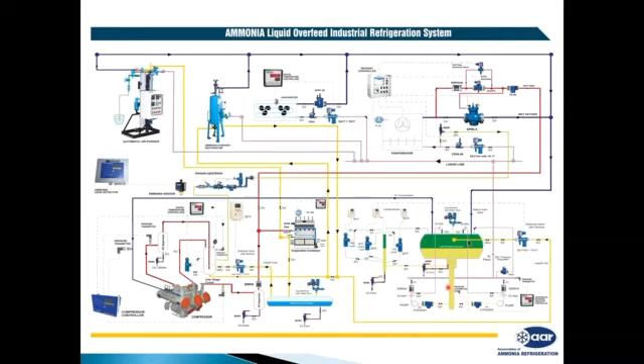One is ammonia overfeed system or ammonia pump circulation system, in which ammonia is circulated through the pump, and another is a natural circulation or gravity fed system, in which ammonia is circulated through the system by the pressure difference. This is because of the pressure difference that high pressure in the receiver travels to the low pressure side of the evaporator. There is a reason this is called the gravity system or the natural circulation system.

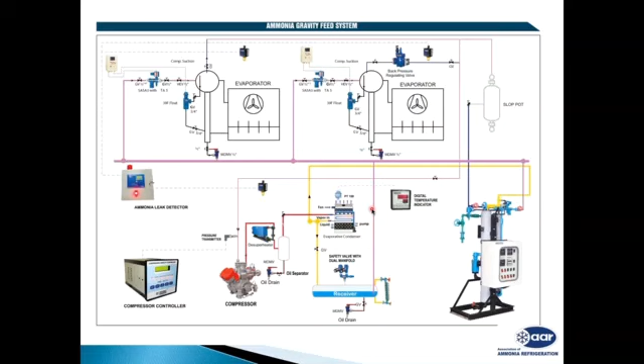The energy, as we consider now today everywhere, energy is the most critical part, and refrigeration is one of the largest consumers of energy in different applications of industry.

If you talk about the dairy segment, it consumes 30% of the energy. But if you go to ice cream, it consumes 70% of the energy or total plant energy. If it is a cold storage, then 90% of the energy of the cold storage is consumed in the refrigeration plant.

So if we are able to save anything in this energy part, we are able to achieve a great saving overall. And saving in electricity is directly affecting the net return of investment and the profit of the company.

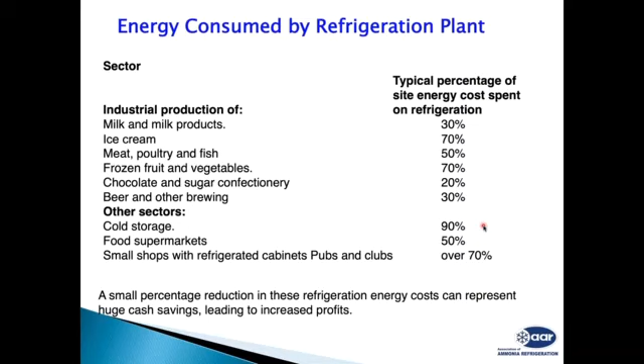So this ammonia, which we are talking about today, for our ammonia refrigeration system, we need pure ammonia. Pure ammonia means it should be 99.95% pure ammonia. Normally, when we buy ammonia from the market, we do not get a certificate of purity. It comes in a cylinder, and many times we don't know what is the purity of the ammonia received. I suggest whenever you are buying ammonia next time, please ask for a purity certificate from the supplier manufacturer.

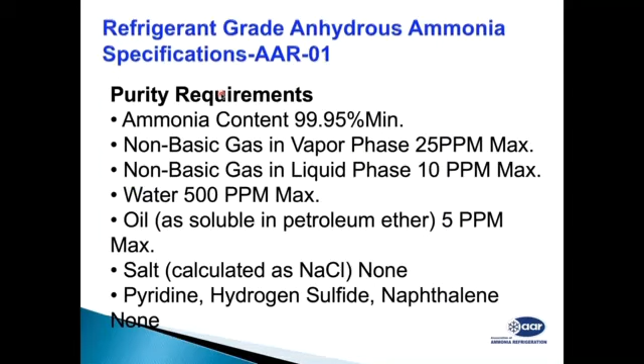So this water and the non-condensable gas, or the air which contributes the major part of it, affects our refrigeration system. Unfortunately it does not affect in a good way as it happens for human beings. Water and air we know is very good, essential for us, but they are not essential, or in fact they are not required in our refrigeration system.

Air is considered a non-condensable gas along with nitrogen, hydrogen, and hydrocarbons in an ammonia refrigeration system, particularly because in our operating range of say minus 45 to plus 40 or 42 degree condensing, these non-condensable gases do not condense or evaporate. They remain all throughout as gases, which does not give any refrigeration effect to us.

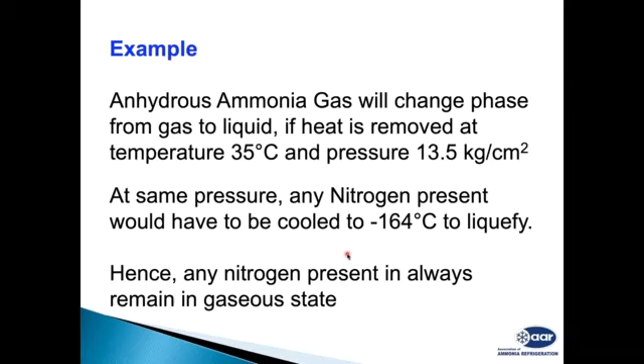For example, if we have ammonia at 35 degrees C, the pressure is around 13.5 kg per centimeter square. But at the same pressure, nitrogen would require minus 164 degrees centigrade to liquefy. So if nitrogen is present in our refrigeration system, it will always remain in a gaseous state, and any gas remaining in the gaseous state in the evaporator side will not generate any positive refrigeration effect.

What happens with this air or nitrogen or other gases, we'll see further - let's see how it comes into our system. Many times our refrigerant does not come with a purity certificate, so it contains non-condensable gases and air, and then our plant is installed.

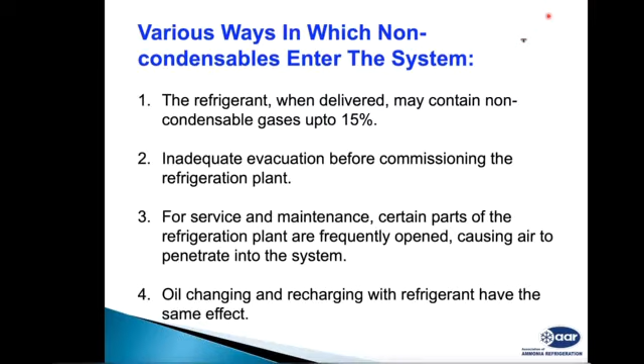When we are pressure testing, when proper evacuation is not done, proper vacuuming not done, after the pressure testing, when for servicing and maintenance we are opening any parts of the system, there is a possibility of air entering into the system. Then when we are charging ammonia oil or removing oil, we are opening a part of the system, and there is always a possibility of air entering into the system.

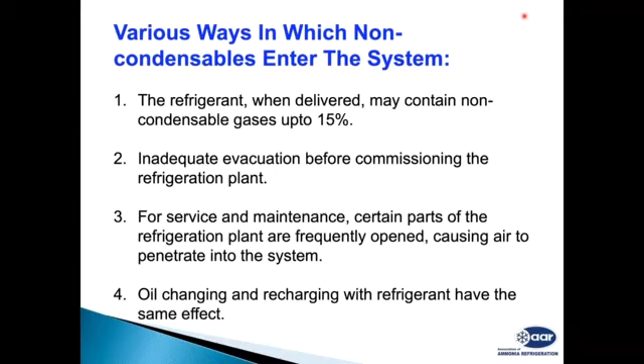Another thing that happens is leakages. When our plant is operating with suction pressure below atmospheric pressure - typically below minus 33 degrees centigrade - and if there is a small leak, whether in the piping, the welds, flanges, gaskets, or the glands, stems of the valves, compressor shaft seal, or sensors connected through sockets, if the plant is in vacuum, it means the pressure inside the plant is lower than atmospheric pressure. Then atmospheric air will enter into the plant.

Another part is that when there is air in the plant, the discharge temperature increases, which increases the ammonia temperature and also the oil temperature. Many times due to high temperature, oil may decompose, and this decomposition of oil, along with the catalytic action with the metallic parts in the system, may decompose the ammonia, because as we all know, ammonia is made of nitrogen and hydrogen. It will break into nitrogen and hydrogen. Both these gases are non-condensable in our system.

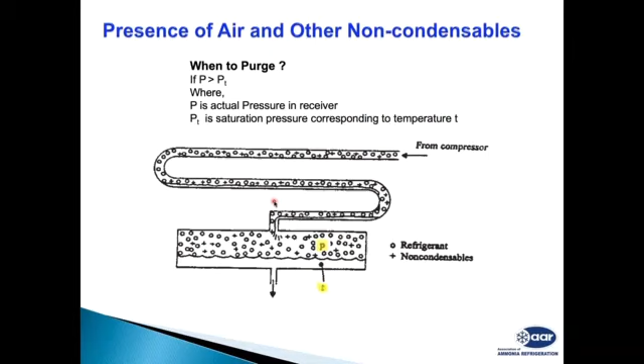If you are able to measure receiver pressure and the temperature of the receiver liquid, convert that temperature to saturated pressure, and find the difference - that is the air. This is our actual pressure measured on the gauge, and this is our equivalent saturated pressure of the liquid. The extra pressure showing is the non-condensable gases. For example, if our gauge pressure is showing 14.5 and our liquid temperature is say 38 degrees, which corresponds to around 13.7 to 13.8 kg per centimeter square pressure, then the difference of 0.7 kg between 14.5 and 13.8 is non-condensable gases.

These gases, the air or non-condensable gases in our system, increase our electricity demand, decrease our refrigeration capacity, and affect the overall performance of the system.

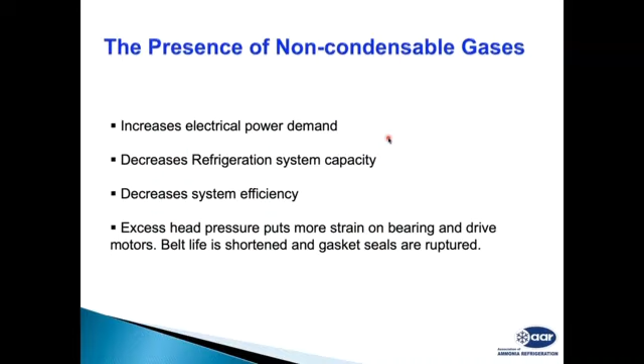Also, as the air pressure, the pressure in the system increases, excess pressure leads to bearing and drive motors heating. It also shortens the belt life. Gasket failures are regular with the compressor. Then increase in pressure also increases the temperature, which shortens the compressor valve life and promotes the breakdown of the lubricant oil in the compressor.

Increasing temperature results in increased scaling on the condensers, where we now need frequent cleaning, which increases the maintenance cost of the condenser. Increase in discharge temperature, as I explained earlier, leads to ammonia breakdown, and ammonia may break into nitrogen and hydrogen, which are again non-condensable gases.

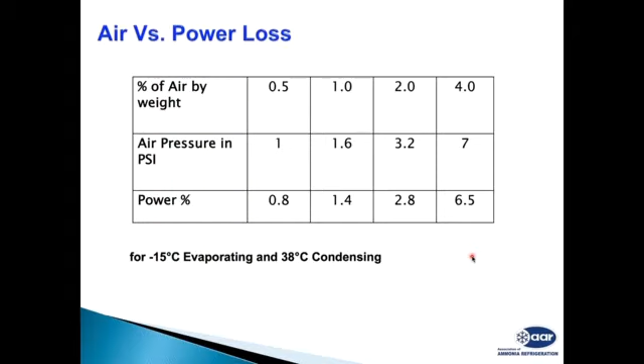So typically, if we have 0.5% air in our plant, the pressure can increase by 1 psi, and power consumption can go up by 0.8%. If we have 4% air by weight in our plant, this power consumption will go up by 6.5%. This is a very high penalty to pay for a running plant, because our refrigeration plant is continuously running. And if air remains in the system, this directly affects the power consumption of the refrigeration plant. If you add the losses from maintenance, oil failure, and component failures, it becomes very high.

So what should we do with this air? Naturally, if you don't want it, we have to remove it. This is called purging of the air. It means we have to take it out of the system.

So what types are available? We can do direct purging, also called manual purging, or we can do automatic purging. Automatic purging means there is equipment provided which will separate the air from ammonia and purge it into the atmosphere or water, whatever systems are available.

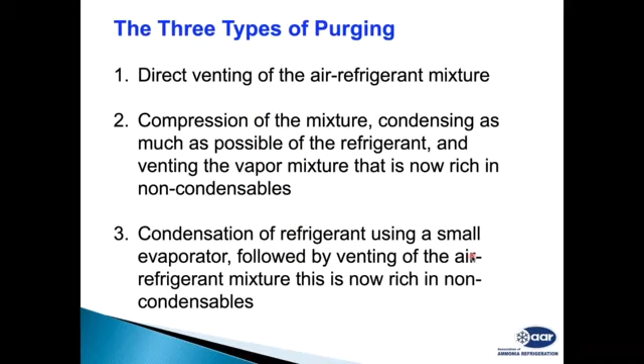Let's see what these three types of purging are, automatic and manual. And then there are two types of automatic purging. One is compressing the mixture and condensing it using an external refrigeration device. Another is condensing the refrigerant using a small evaporator, using the refrigeration system itself, in which separate compressors are not used.

Typically, what manual purging is, is we have a purge valve provided at the receiver or at the inlet of the condenser. It means we have to do it manually, shut down the plant, let the water run in the condenser for maybe an hour or so. So whatever ammonia gases are there get cooled down and become liquid, and what is left at the top is air.

You must understand the density of air is lower than ammonia, so air will go up and ammonia liquid will go down. So we have to give sufficient time to let it settle, with air ammonia liquid down and air up, then open the valve manually.

One has to take the most important precaution when opening these valves. We should wear a mask, gloves, and goggles, so that in case ammonia comes out of this valve, you are not affected. The possibility of ammonia leakage is always there. These precautions are very important.

Now it depends on the operator how much time he's going to spend on this, whether he's going to do it every day, or once in 15 days, or once a month. That totally depends on the plant management and the facility available to purge this air.

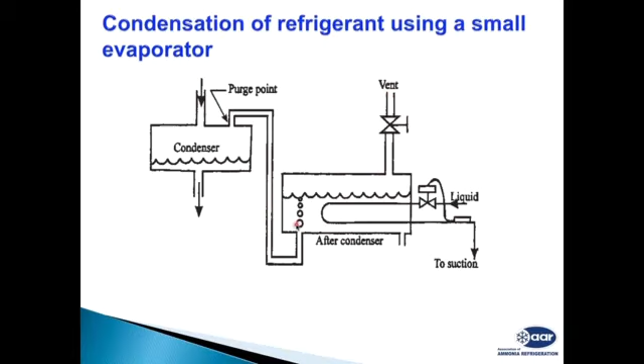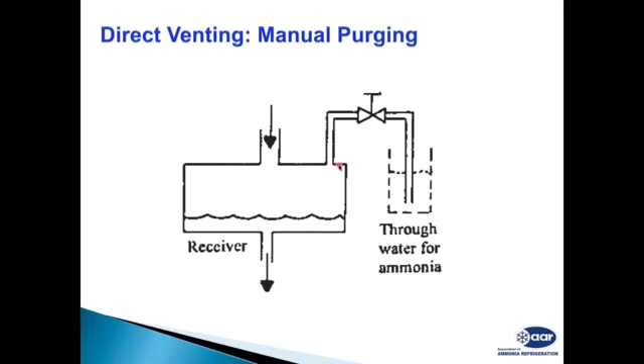Normally, it is provided with an automatic control system, so it will sense the difference between liquid ammonia and non-condensable gases, and it will vent out when the vessel is full with non-condensable gases. Remember, whether manual purging or automatic purging, the purge points are very critical, very important. From where we connect the system is very important.

So we'll talk about purge points afterwards. So as I talk about manual and automatic purging, what are the advantages of automatic purging?

Automatic purging removes air online continuously without affecting the system performance. No need to shut down the system. No need to have an operator to operate it. As it is an online system, it removes air immediately. There is no labor cost. There is no safety requirements. There is no manual intervention required in operating this purger.

Whereas there is a disadvantage, it has got initial cost. We have to maintain those purge units, maybe solenoid valves and other transducers connected to these things. But this is about capital cost. We will see later on what is the saving versus the investment.

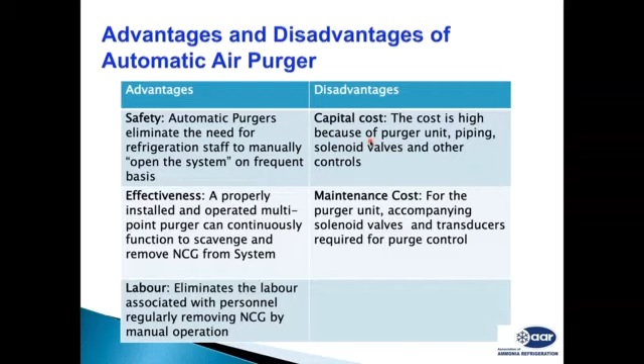As I said, proper location of the purge points is very important. For example, when doing manual purging, when you are shutting down the condenser, you have to purge it from the topmost point of the condenser or at the inlet point of the condenser, that is the topmost point of the system. But when you are doing automatic purging, this totally changes.

In automatic purging, we need to separate the air and the gas. In our refrigeration system, gas coming from the compressor to condenser may contain air. At the entry point of the condenser, this air will be at the same velocity as the ammonia. So if we try to take a purging point from the inlet of the condenser, our ammonia will come out. Let's say we have 5% air in the plant.

So when we are opening an inlet purge valve at the inlet of the condenser, 5% air and 95% ammonia means 95% of ammonia gas will go to the purger. So it will not work.

So we have to have purge points where there is minimum presence of ammonia gas, and we are able to separate out the ammonia liquid and the non-condensable gases or air.

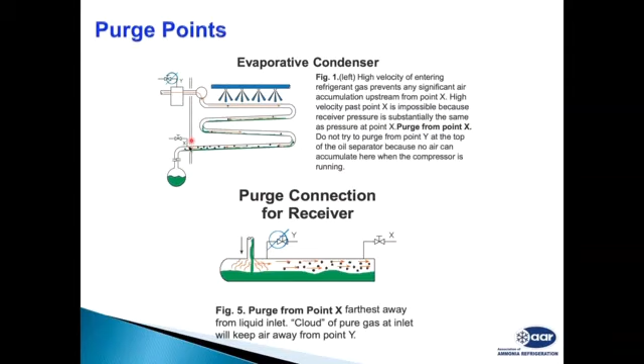But as we go down, at the end of the condenser, whatever ammonia gas is there becomes liquid, and what is accumulated is the air. So this foul gas, as we call it, we have to tap it at the outlet of the condenser.

Different applications. This is a manual purge point for the evaporative condenser. These are the purge points for the automatic purging system.

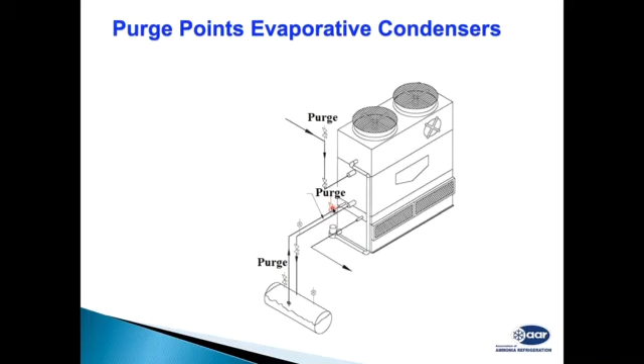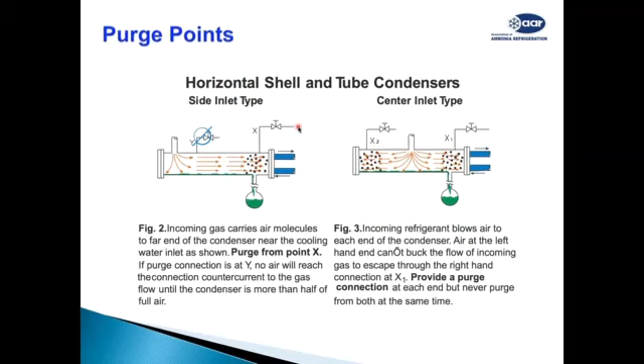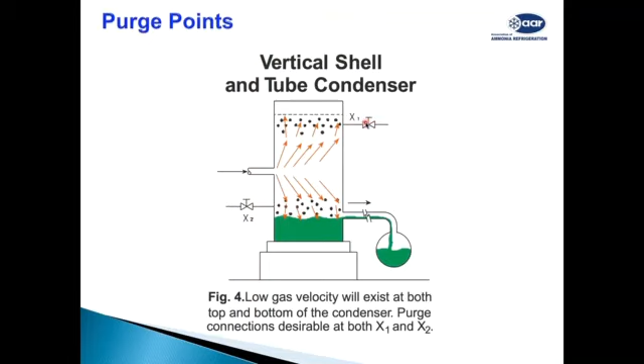Very uncommon now, but if we have vertical condensers, if this is our liquid entry, it should be on the top of this condenser side. These are the typical examples showing how two purge points are being taken.

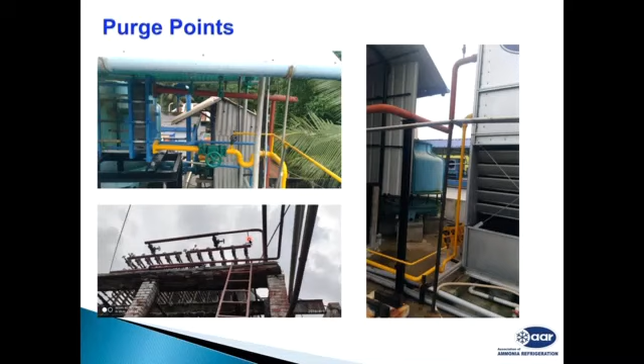In small cold storages, many times we use atmospheric condensers. We can use and install an air purger on atmospheric condensers also. You can see here this header is connected for a condenser, and the purge point is taken from this place on the header. So these are the different purge points we can connect. Always remember, success of an air purger depends on the proper purge point connections.

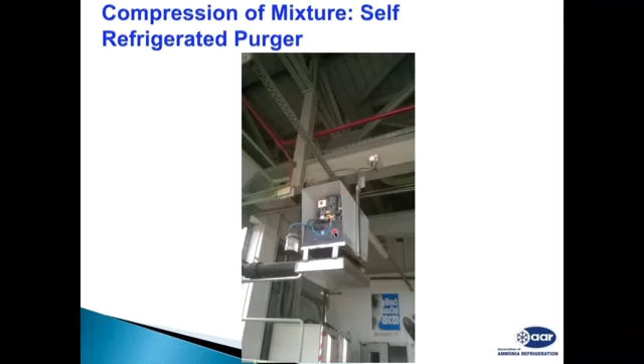This second one is a photograph of a purger which is being run using a refrigeration system, an in-house refrigeration system.

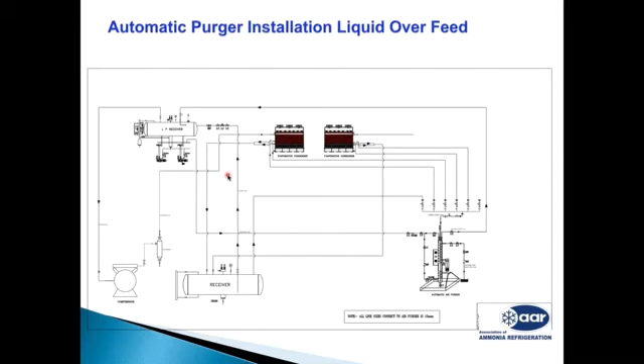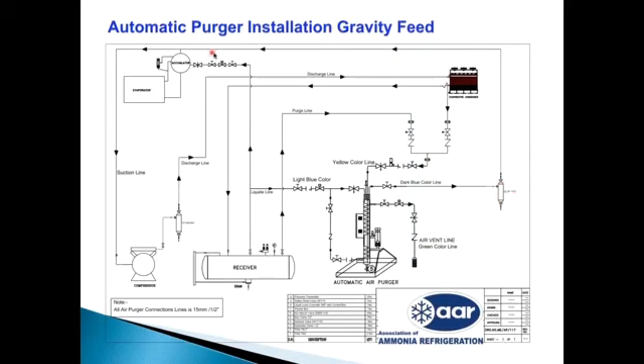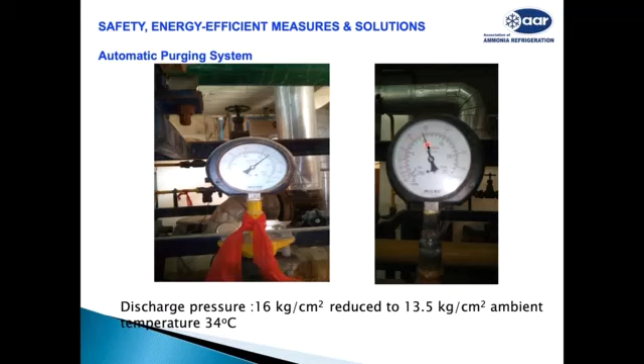These are the two examples of energy saving I will give you. Typically, a freezing plant operating at minus 40, evaporating, and condensing at 38 degrees centigrade with 500 refrigerant kilowatt capacity, power required is around 280 kilowatt.

If our pressure is 1.5 kg higher, that is from 13.7 to 15.2 kg per centimeter square, then power required will go from 281 kilowatt to 300 kilowatt to achieve the same refrigeration capacity. So this 19 kilowatt extra for 6,000 hours of operation in a year is around 114,000 kilowatts.

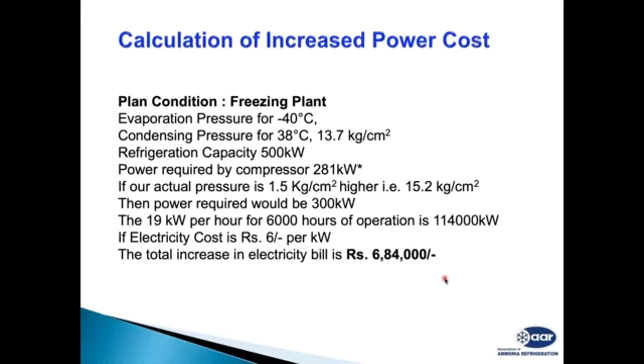Considering the cost of power in India, which is around 6 rupees per kilowatt, it will cost us around 6,84,000 Indian rupees. So you can consider the payback period can be almost less than a year.

A typical and very regular application in India is potato cold storage. We have more than 14,000 potato cold storages in India, typically 5,000 metric tons as a standard size. I've made a case study for this, showing practical results obtained from a potato cold storage with one 6-cylinder and one 3-cylinder compressor.

This is a positive, at minus 10 evaporating, meaning our evaporating pressure is higher than atmosphere. In spite of that, air gets into the plant, and that costs 9 kilowatts per hour that we are consuming. Potato cold storage normally runs 9 to 10 months in India, so I've considered only 5,000 hours of operation. At 6 rupees, that comes to about 270,000 Indian rupees.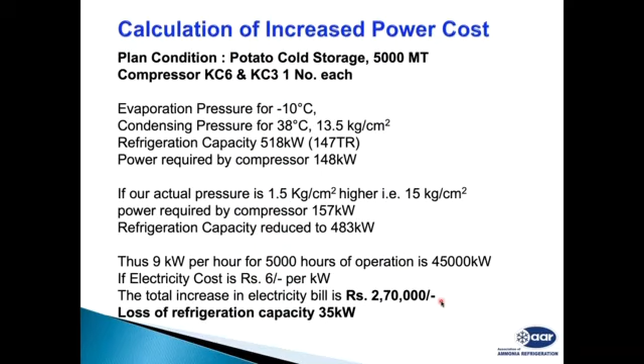Also, this will have a refrigerant capacity loss of 35 kilowatts. To compensate for this 35 kilowatts, you may have to run an additional compressor, or compromise on the refrigerant capacity of the system. If you add this 35 kilowatt refrigerant capacity loss, the cost will go up to almost 400,000 Indian rupees, or 4 lakh rupees. This is the net cost benefit of removing air using the purger. These are the practical results achieved.

The next part of this topic is water contamination in ammonia refrigeration systems. We are going to see what happens if there is water in the ammonia. Please remember, air and ammonia are two separate things. Air does not mix with ammonia, but ammonia has very high solubility with water. That means water and ammonia are very good friends. If they come together, they immediately mix - we call this ammonia and water having a great affinity to each other.

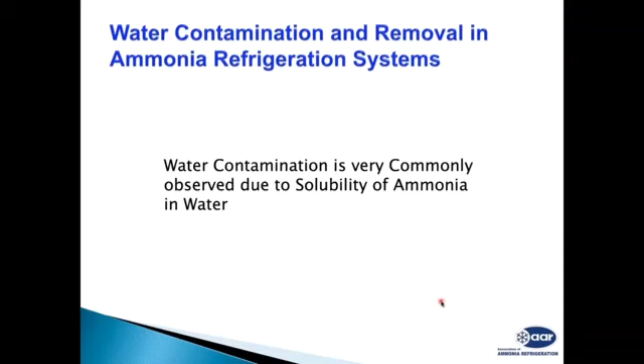At atmospheric pressure at 30 degrees centigrade, a saturated solution of ammonia and water will contain 30% ammonia. That means in water we can have 30% ammonia mixing at 30 degrees centigrade. Now if we go to 0 degrees centigrade, typical for positive cold storage applications, this ammonia solubility goes to 46%. And if you go to minus 33, which is our freezing and cold storage temperature, the possibility of ammonia mixing into water is 100%.

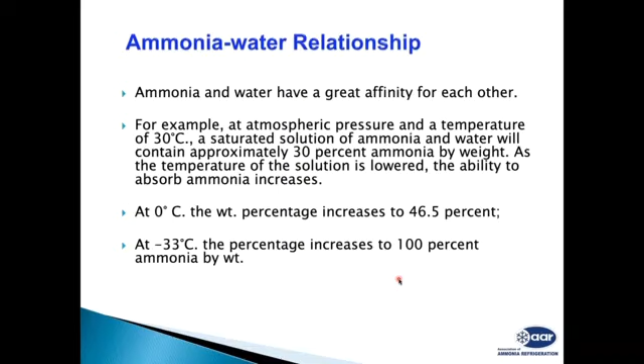It means 100% solubility is there for ammonia at minus 33 degree temperature. Now what happens is when ammonia and water mix, it becomes a hydrous ammonia solution. Remember, I told you at the beginning, we need anhydrous ammonia of 99.95% purity.

Now, if there is water, if we have 10% water in a refrigeration plant, at minus 0.3 kg per centimeter, around minus 40 degrees, we will get only minus 38 degrees. Instead of minus 40, we'll get minus 38. If it is 30% water, we'll get only minus 32.

So it means if we want to get minus 40 with 10% ammonia dilution, we need to lower our actual suction pressure. It also means the ammonia temperature has gone up, so we need to lower the suction pressure. We have to operate the compressor at lower suction pressure, which costs electricity and affects the refrigeration capacity of the system.

At 2 kg per centimeter square, where we should get minus 9, a typical potato cold storage requirement, 10% ammonia dilution will give only minus 7 instead of minus 9. Again, this directly affects our power consumption of the system. Power consumption is one effect, and there are also other effects in the system we'll see.

Let's see how water comes into the system. There are two ways in which water enters: contamination during construction and initial startup, and contamination after the system has been running.

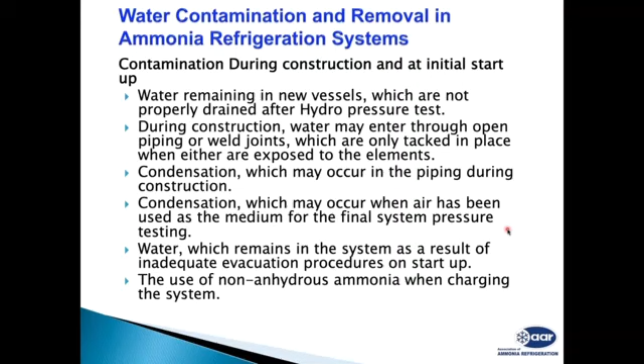So water will always remain at the bottom. Consider a case when we are charging ammonia into the plant. Ammonia cylinder pressure is higher, so when we connect it to the system, the ammonia starts passing from the ammonia cylinder to the plant. When the system pressure equalizes, our operator always sees that there is some water into the cylinder, so he has to actually elevate the cylinder so that it can drain the remaining ammonia into the system. But what he does is that he tilts the cylinder by 180 degrees, so whatever water into the cylinder which was at the bottom is made sure that 100% it enters into our system, and that water starts coming in.

Then there is a possibility of rupture of tubes, like on the condenser side or the receiver side, shell and tube, ice bank tanks, chillers. We have these systems where there's a possibility of water and ammonia coming in contact. If any ruptures or leakages are there, then water will enter into it. Then sometimes while draining the oil or refrigerant from the system, there are possibilities of water entering into the system. Also when system is operating below atmospheric pressure, during the pump down, leakages into the valve stem, hoses or flange joints will make sure that air enters into it, and along with the air, water will enter.

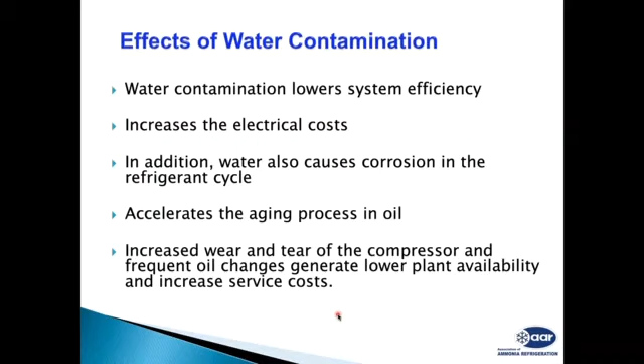It also, now that water is present in the system, starts corroding the equipment and material, because most of the time we use steel components or steel material in the refrigeration system. The corrosion of this equipment starts because air is entering into the system, which brings nitrogen, oxygen, then water into ammonia and the metal parts causes a lot of corrosion. Secondly, when this water normally mixes with the oil, it will start the aging of the oil. Aging of the oil means the oil quality will continuously deteriorate. Oil's capacity to function as required will deteriorate, which will increase the wear and tear of the compressor. We need to frequently change the oil, so oil consumption goes up.

These are all the effects of water into the system. So where water accumulates, as we have seen air accumulates in the high pressure side of the system, water occurs on the low pressure side of the system. It can occur in the low pressure receiver system. If we have a high stage booster system, it will always occur in the booster system.

In flooded systems, water will find its way into the evaporators and surge drum. In DX systems, it will be in the suction accumulators.

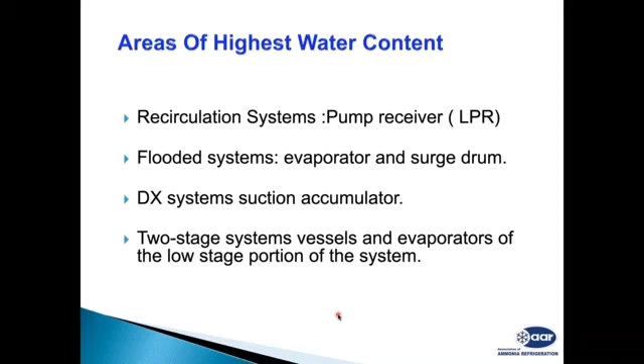Why does it go into the low side? The ammonia vapor and water have a large pressure difference. For example, at 2 degrees centigrade, the vapor pressure of ammonia is 3.6 kg per centimeter square, whereas the water pressure is 0.007 kg per centimeter square. So when your plant is running, at a suction pressure of 3.6, the ammonia will evaporate and the gas will go through the system, but water will remain at the bottom of the system. This water will continuously go on accumulating in the low side.

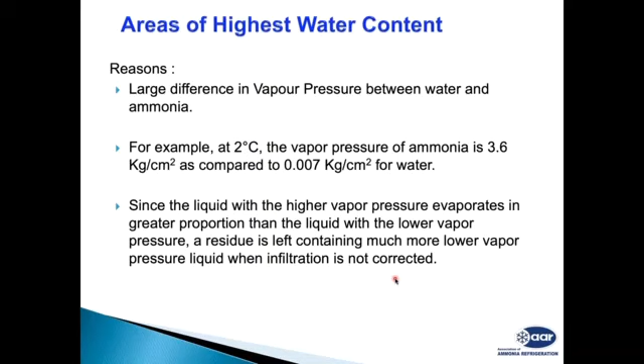Can we detect and understand if there is water in our system? Like air, we can find out the pressure difference between the actual pressure and saturated pressure of the liquid, corresponding to the liquid temperature - that difference is air. Similarly, that's the easy way for air. For ammonia and water, it's a bit more difficult, but it can be measured.

You need an ammonia evaporation test tube tongs, the sampling assembly, a vented stopper, and a water bath in which you put this beaker. Fume hood, rubber gloves, face shields, and safety equipment are very important.

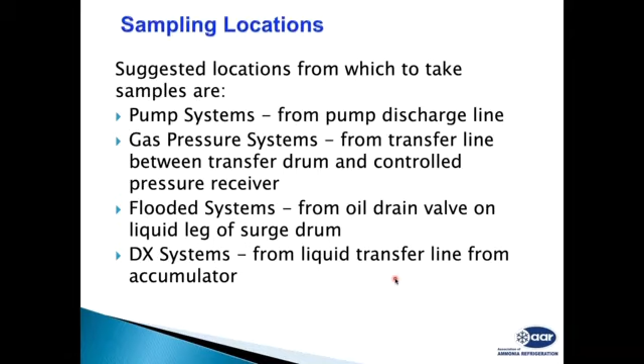Where can we take this sampling of the water? We can take the sampling from the pump systems, the oil drain valves, and from the liquid transfer lines from the accumulator in DX systems.

Once we connect, this is the procedure: wear protective clothing, face shield, and hand gloves. It's very important to make sure you have all the PPE equipment available before taking any sample. Connect the sampling converter to the liquid ammonia system - into the low pressure vessel ammonia liquid line, pump liquid outlet, or to the oil drain valves in the gravity feed system.

Make sure the glass is secured, then connect it and take a sample. Normally what we suggest is: close the valves of the sampler and crack open the valve, one turn only, depending on the length of the pipe and the temperature upstream of the converter. It may take 5 to 10 minutes to get a sample.

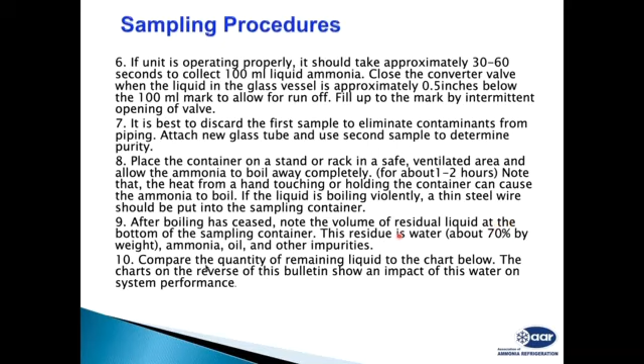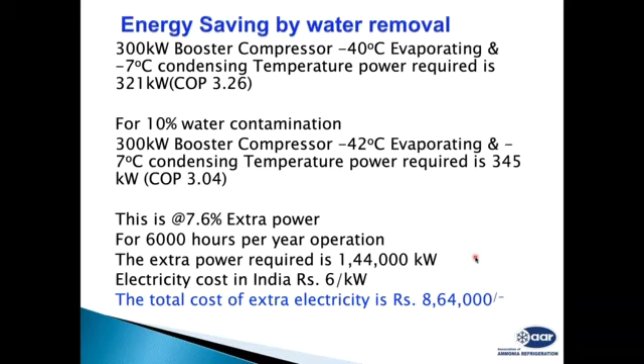So that's all about today's presentation. Let me go through a quick review of what has been talked about today. Today's takeaways: air accumulates at the high pressure side of the refrigerant system, like condensers and receivers. Presence of air increases discharge pressure, increases power consumption, reduces refrigeration capacity, increases wear and tear of the compressor, increases scaling of the condenser, and of course, all this costs money.

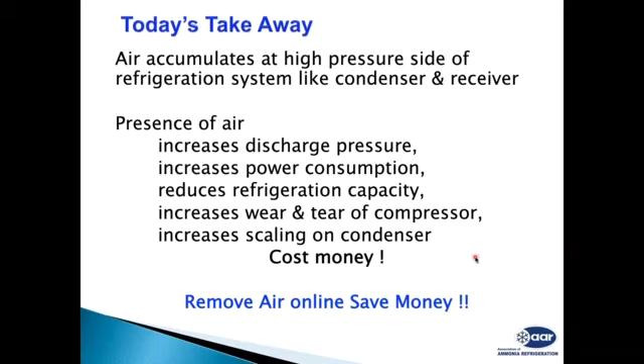Now, what I suggest: remove air and save energy. On the water side, water accumulates on the low pressure side of the refrigerant system, like evaporators and pump circulator vessels. Water has a great affinity with ammonia, and it makes a hydrous ammonia solution. Hydrous ammonia solution does not perform as per our standard pressure-temperature chart, and it increases the ammonia temperature.

So presence of water increases ammonia temperature, contaminates and lowers system efficiency, increases electricity cost, causes corrosion in the refrigerant cycle, accelerates aging of the oil, increases wear and tear, and increases service and manpower cost.

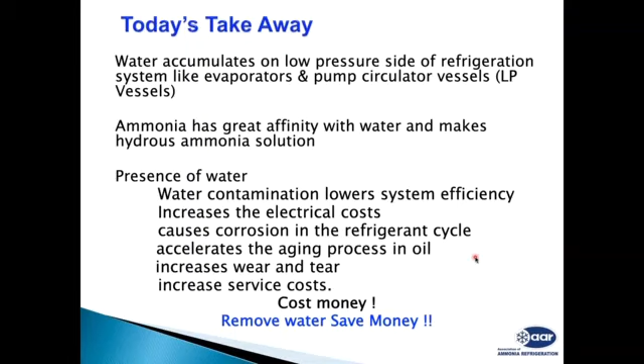So again, this costs money. Remove water continuously and save money, because finally we are in business - saving money, having better efficiency, a better working system, less maintenance, less pull-down times of the plant, less shutdown times of the plant are all important. So all this leads to making an efficient and safe plant.

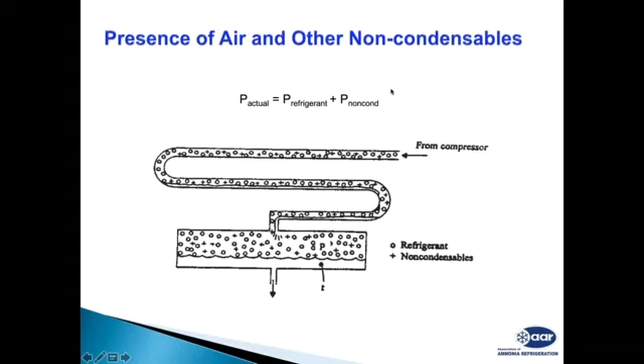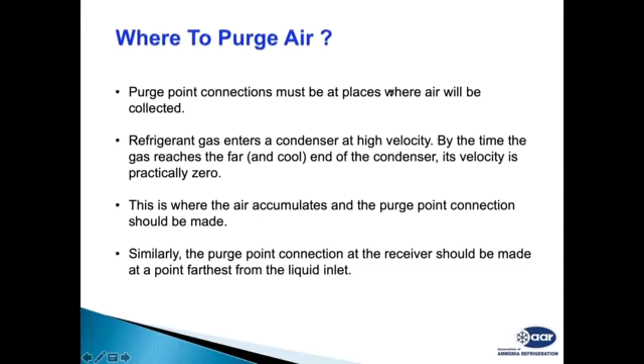No, water does not freeze because water remains water. When ammonia and water come together, as I told you, it becomes a hydrous solution. It's not ammonia - it doesn't remain ammonia, and the water becomes a solution with it. So it does not freeze. Water remains - water and ammonia become one.

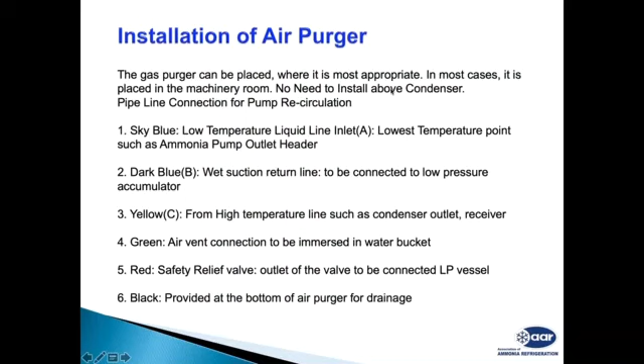Thank you, sir. Our next question is from Mr. Praveen Chopde. You want to explain something more, sir? Tell me.

At minus 40, if you have 30% ammonia, the ammonia pressure will rise, so instead of minus 40, you will get minus 32. It does not freeze the water because it has become one solution. It's like oil and ammonia - oil does not mix with water, and oil does not mix with ammonia either. But in case of water, water and ammonia mix together and become a hydrous solution, so it does not freeze. But of course, the presence of water in the ammonia affects the functioning of valves and controls because it starts corrosion of the material.

Thank you, sir. Our next question is from Mr. Praveen Chopde, asking is air and water having the same losses in freon gas also? Yes, freon also has losses - that depends on the characteristics of which synthetic refrigerant you are using, because synthetic refrigerants require more power. In fact, losses are more with synthetic refrigerants as compared to ammonia.

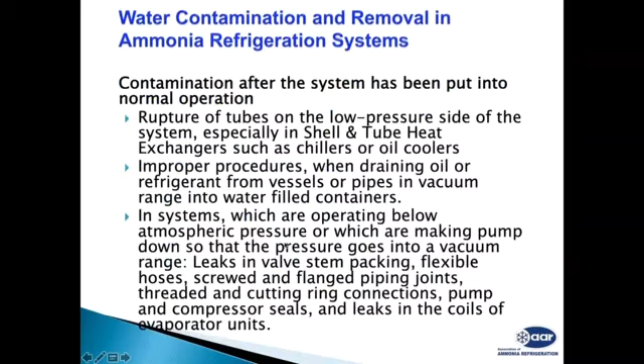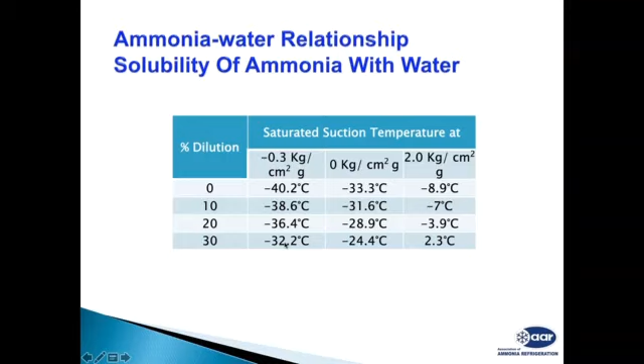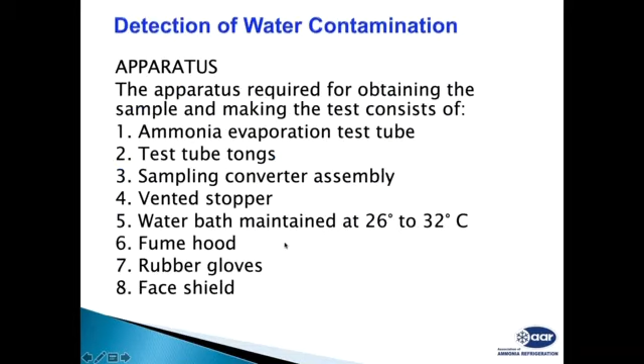I have already explained how to measure water contamination. One simple way: if your suction pressure and suction temperature do not match - like your compressor is running at 2 kg and you are not getting the corresponding minus 9 degrees centigrade, meaning your suction ammonia temperature is much higher - then definitely you have water in the system. That's the first indication. Secondly, I have explained how to use the apparatus and take a sample, use this sampler to get ammonia from the low side, let the ammonia evaporate, and what remains is the water.

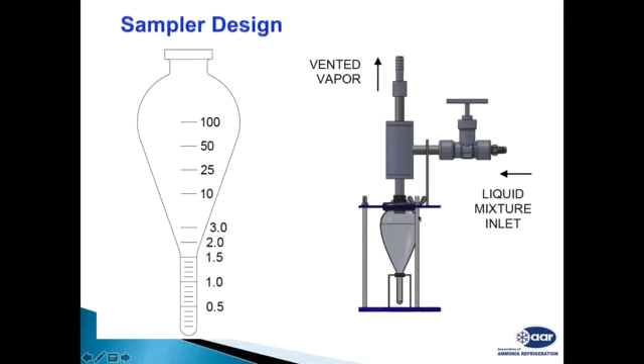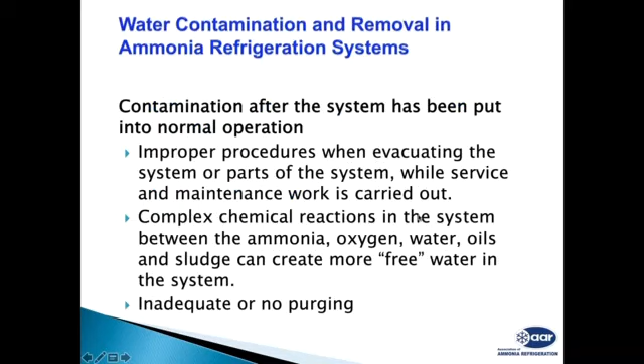What I explained in the example is the quantity of water or moisture in air which enters into the system. The example I gave is that when we have this purger running in our system, assuming it removes 5 liters of air per minute, this figure of 459 liters, or 46 liters per year, is water entering with the air. As I told you, the water finally gets accumulated at the low side of the system, whereas the air gets accumulated at the high side. When the purger removes the air, the water remains in the system. Water does not go out - the purger will not vent the water, and water will remain in the system.

Okay sir, our next question is from Mr. Daniel Masia, and he's asking how we can remove water from a running plant.

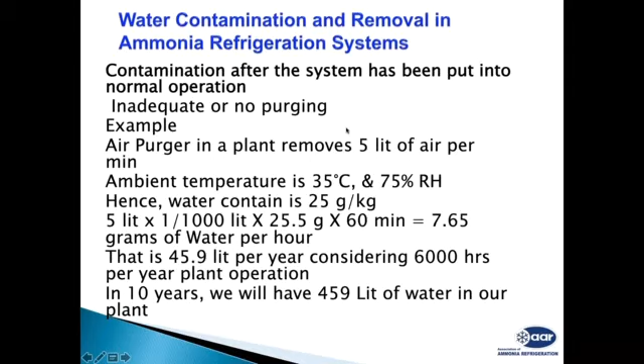You can use an ammonia dehydrator system to remove the water. This dehydrator is connected in a plant which is running continuously. So whenever water accumulates at the bottom, you can drain it using this dead man's valve into the bucket, with the safety system. If there is no water, the vessel will always be full with ammonia, so you don't have to drain. But once water accumulates in the system, you can drain it while your plant is running.

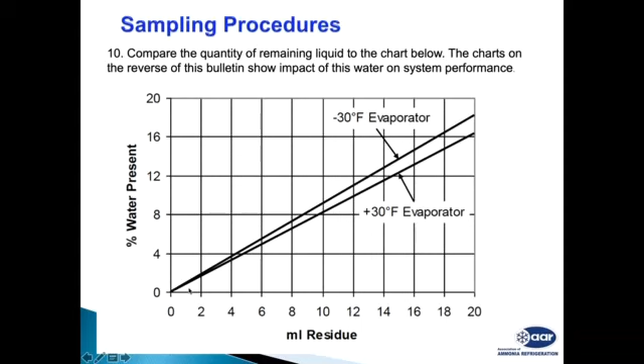If you are not using an ammonia dehydrator, then you have to drain it from the oil drain points provided at the low pressure vessel and also at the evaporator side, low pressure side. But remember, when you are using these points, the possibility of ammonia coming out from that point is also there. And as water is mixed into the ammonia, it may not separate out and may not evaporate completely. So you need to take proper precautions when draining manually. It is better to use a dehydrator which will separate ammonia and water and give you only water to drain out.

Thank you sir. Our next question is from Mr. Praveen Chopde, and he's asking about your view on low charge ammonia refrigerant systems. Also, is it compulsory to buy an automatic air purger and ammonia purifier system for chiller applications, for those who are buying only chillers?

Sir, I'll try to answer the second question first. If you have a chiller system and you check your compressor system performance - if your suction pressure and discharge pressure are as per design parameters and as per the ammonia pressure temperature chart, running without any problem, maintaining the corresponding pressures and temperatures as mentioned, then you may not require it. But if your chiller is not getting the performance, your discharge pressure is higher than the design required condition, or if your suction pressure is lower than required...

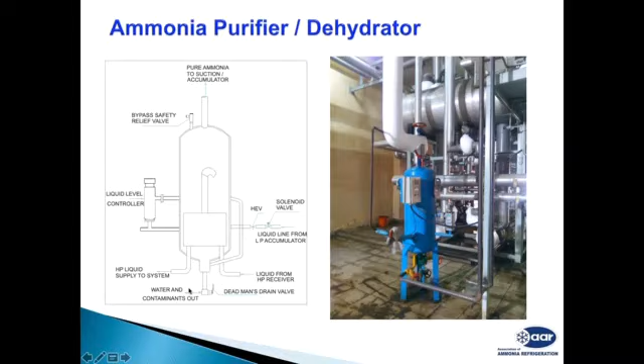Thank you sir, I'd like to take the last 2 to 3 questions. So the last one, the first part was about low charge ammonia refrigerant system.

Yes, low charge ammonia systems are definitely the future, but you have to consider your application - whether you really need to go for a low charge system, or there are alternatives depending on your system. What are the rules and regulations, whether your ammonia charge in your present system is permitted as per government rules. Because when you go for a low charge ammonia system, there is definitely additional cost - additional cost of the equipment system. So you need to find the balance. If you are putting up a plant in close vicinity to cities, better go with low charge ammonia systems. But if your plant is in an industrial zone, find out whether your charge is not exceeding the limit, then you can consider what you want to go with.

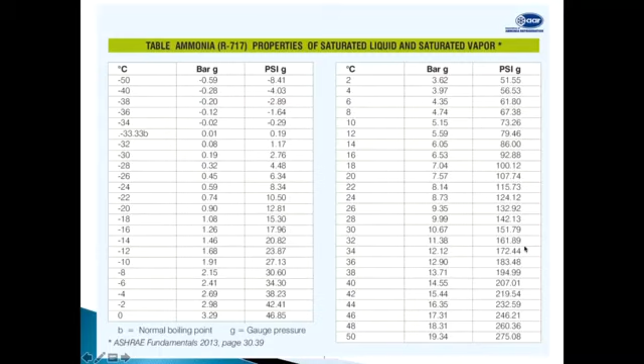Our next question, sir, is from Mr. Satish Mahajan. He is asking, is it possible to remove system water from the ammonia purifier? Yes, that is the function of the ammonia purifier, to remove the water. It will remove water and oil only.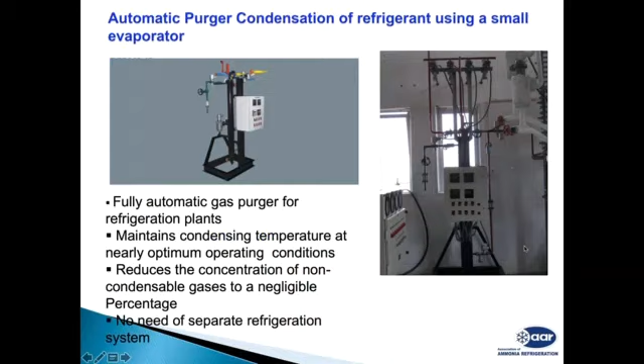Thank you, sir. I'd like to take the last questions of today's session, from Mr. Praveen Salunke, asking is there any government norms compulsion for use of air purger and ammonia purifier? At present, there are no compulsions of using these purgers or ammonia purifiers in India, and also no government incentives for using them. But in my opinion, it is very important for the client, for plant benefits, extending plant life, and achieving better performance. It is better to install automatic purging systems and ammonia purification systems.

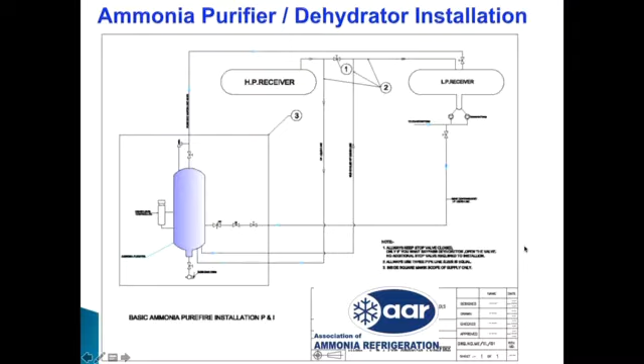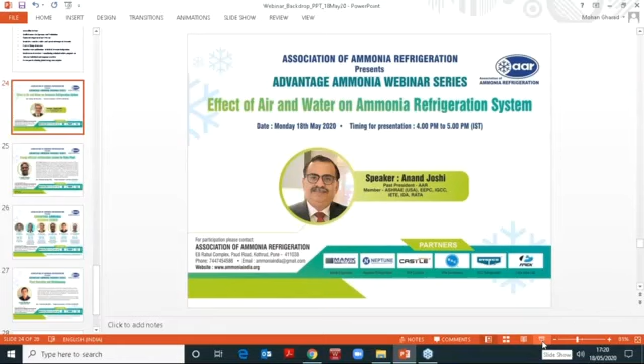I would like to take our last question of today's session: how much time is required to install a dehydrator in an existing system, from Mr. Pawan Kumar. Whether this automatic purging system or ammonia dehydrator system can be installed in existing running plants in 2 or 3 days maximum. You don't need much shutdown time—it's just the time required to connect it to the system, because systems are very easy to install, and 2 to 3 days are more than sufficient to install in an existing plant.